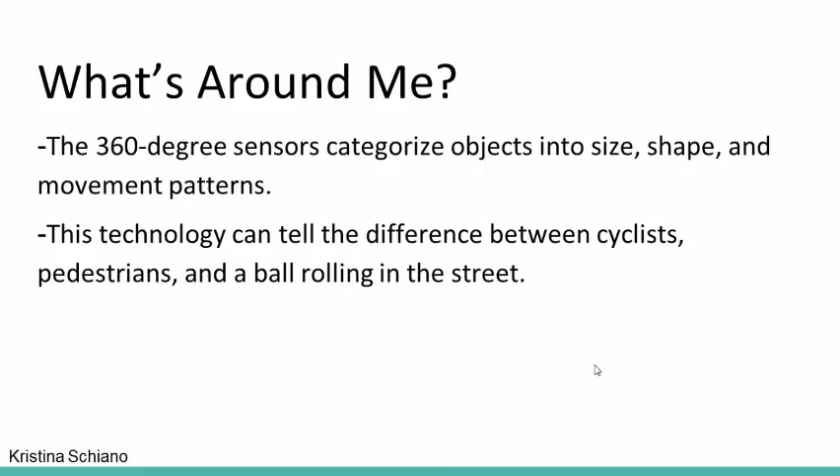The car really has to know the difference between different objects, which is very necessary. What will happen next?

The programming that went into predicting the future was meant to ensure passenger and pedestrian safety. It can sense when a pedestrian is about to cross the street or if a car is about to switch lanes.

It studies how fast objects are moving in relation to their size, and whether a driver is being reckless, or what the road conditions are like.

What should I do? The vehicle is programmed to react according to the obstacle or upcoming objects. This involves slowing down, speeding up, and moving toward the far part of the lane when a big truck is approaching.

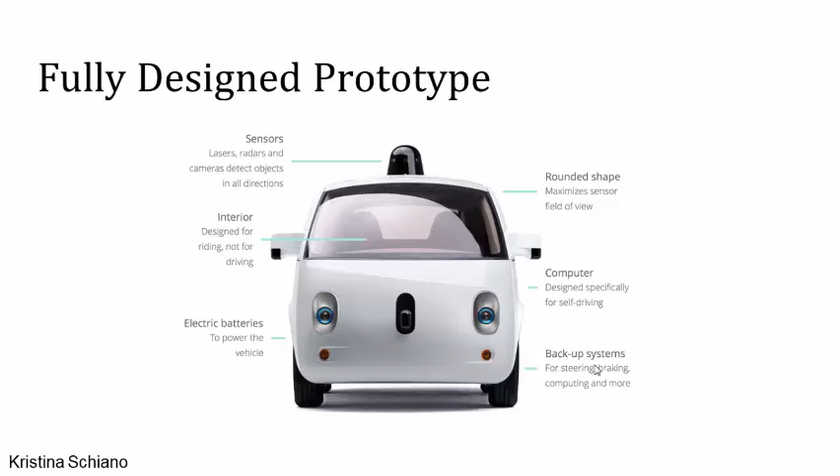There are electric batteries which power the vehicle, along with backup systems for steering, braking, computing, and more. There's also a computer installed to handle all the functionalities of the self-driving system.

As for the launch of the project, on-road testing has already begun, gathering over 1.5 million miles driven.

Google self-driving cars can be seen on the streets of Mountain View, California, Austin, Texas, Kirkland, Washington, and Metro Phoenix, Arizona. These cars are still going through field tests and are not yet available for purchase.

I actually watched the news and saw that a lot of these are being banned in certain states because they're not really ready for fully self-driven cars yet. So that's something we have to look at. So the second innovation is straddling buses.

The concept of the straddling bus was first developed by Huashi Future Parking Equipment Company in Shenzhen as a way to solve traffic problems in Beijing and other regions in China.

They faced an obstacle: to develop a transportation system that didn't add to current traffic congestion but reduced it, and one that didn't require building new transport infrastructure. This is where the concept of the straddling bus came into play.

If you know Beijing, they have some of the worst traffic, and their streets are usually always congested. So Huashi Future Parking Equipment Company came up with this concept to solve that problem.

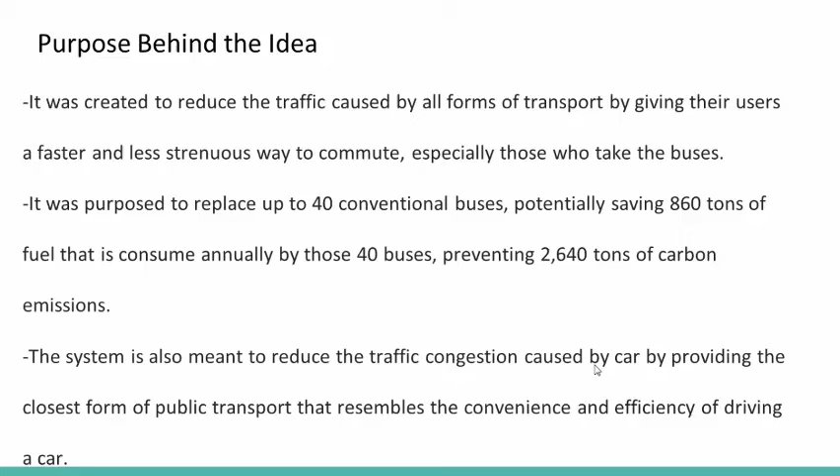Preventing 2,640 tons of carbon emission. The system is also meant to reduce the traffic congestion caused by cars by providing the closest form of public transport that resembles the convenience and efficiency of driving a car.

I'll explain more. The design concept of the straddling bus is very unique. The bus has two levels. The upper level carries passengers, while the lower level is the vehicle pass-through. It is wide, straddling 2 lanes at a time, letting traffic pass underneath when it is both stopped and when it is in motion.

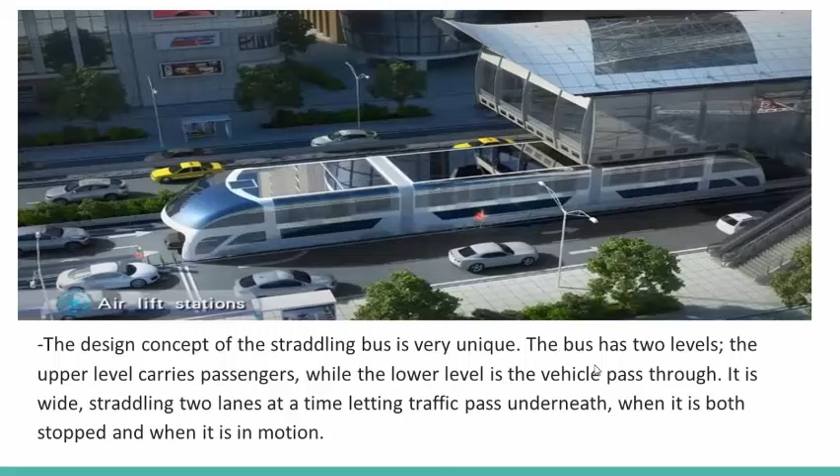Here's another picture of the bus actually going on the street. So you see it as it's moving, cars going inside the bus.

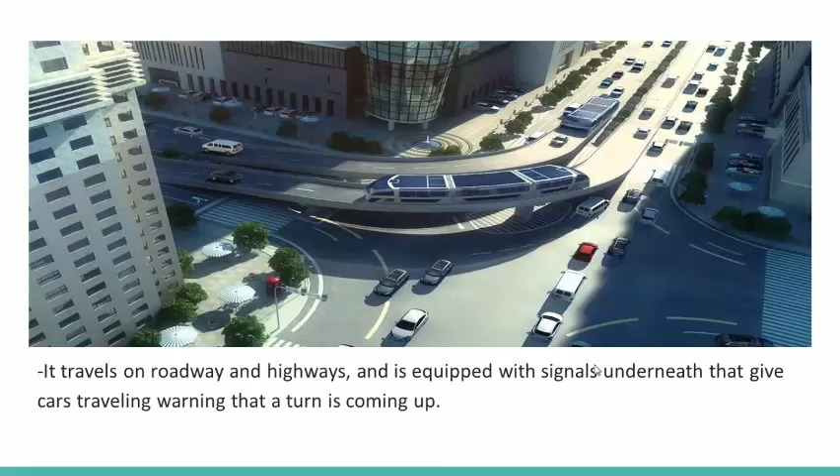It travels on the roadway and highways and is equipped with signals underneath that give cars traveling a warning that a turn is coming up. The bus has the ability to carry 1,200 to 1,400 passengers at a time.

Each car could hold up to 300 people. The buses are 6 meters wide and travel up to 60 km per hour. The underpass of the bus is 4 to 4.5 m, allowing only cars 2 m or less to pass underneath.

There are radars and sensors in the underpass that alert drivers passing underneath if they get too close to the bus, which also warns traffic approaching from behind if a vehicle is too tall to go under the bus. There will be sensors all over the bus to prevent things like collision and to warn drivers when the bus is about to turn.

Advantages of the straddling bus. The advantage of the straddling bus is its construction time. The construction of the bus can be completed within a year for a 40 km guideway.

It doesn't add to the pollution, but rather reduces it and uses renewable sources of energy. It doesn't add to the traffic jam, but reduces it by reducing the amount of vehicles on the road.

There's also no need to build parking structures for the bus, because cars can always go in through the bus when they are parked. So it doesn't really affect traffic, because traffic goes right into the bus. Construction of the bus also costs 10% less to make than what it costs to make traditional subways.

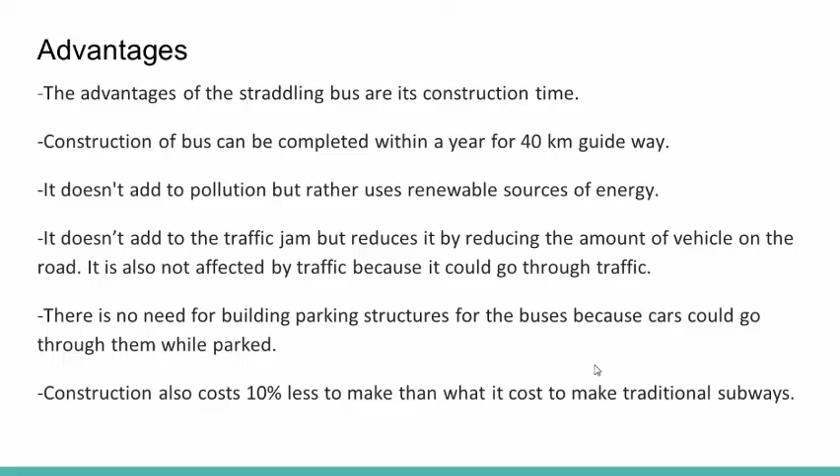Progress. In 2010, after the straddling bus was named one of Time Magazine's top 50 inventions of the year, the Beijing district of Mentougou proposed to begin trial runs for the new buses. The district planned out 186 km for the construction of the bus, but they put a hold on the actual project until the company establishes a prototype that is proven successful in trials.

So they actually put a hold on it just because originally they saw the idea and wanted to implement it without it going through trials. So they put a pause on that, and they're waiting for the company to actually do a trial model to show if it's actually possible for this to work and succeed.

So in 2013, the city of Manaus in Brazil signed a letter of intent with the Chinese developer to create a straddling bus system. Due to its short construction time, added benefits, and interest by other populated cities, we will be seeing this form of transportation in the next 30 years.

The Hyperloop. The Hyperloop was first proposed by Elon Musk in 2012. The concept of the Hyperloop consists of capsules running inside vacuum tubes with electric compressor fans in the nose of each capsule, which run on battery packs.

The battery pack will run during the entire trip with energy to spare, as the electric compressor's fan draws in air, which is expelled from the bottom of the capsules by motors to provide an air cushion that will suspend the capsules while it travels at 700 miles per hour.

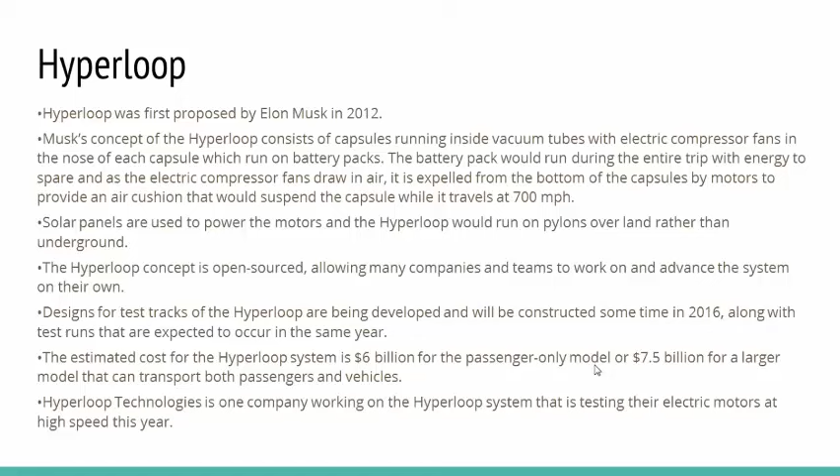The estimated cost for the Hyperloop system is $6 billion for the passenger-only model, or $7.5 billion for a larger model that can transport both passengers and vehicles. Hyperloop Technologies is one company working on the Hyperloop system that is testing their electric motors on the high speed this year.

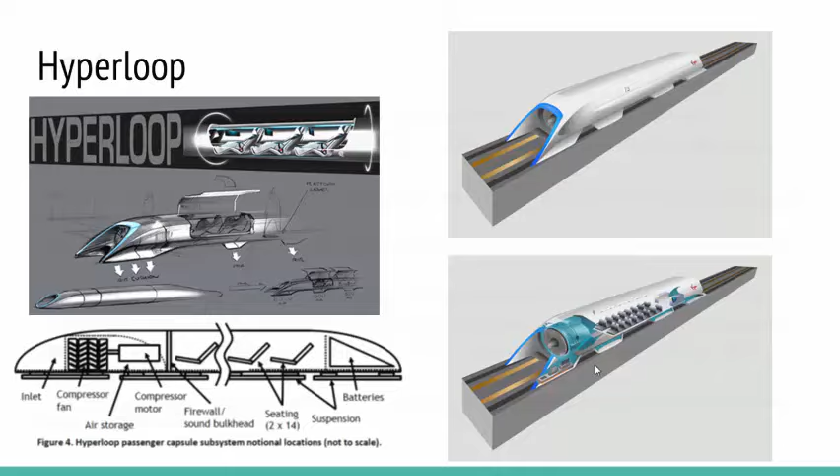The next system was developed by Tommaso Gecchelin, who has been working on the idea since 2012 and has improved upon it since, with his recent version being the 3.0 version.

Next are cube-shaped driverless pods that operate like taxis. They are called from the Next app and can fit up to 10 people. Next uses existing roadways and a cloud-based routing system that coordinates the autonomous pods, which can link together to create a chain of pods traveling to the same location.

One very innovative and convenient feature of Next is the service pods, which allow passengers to order service pods such as bathrooms, coffee shops, or restaurants, which come in their own pods and link up with your pod. So if you want coffee or want to use the bathroom, you can request it on your smartphone, and as you're traveling, another pod will connect with yours.

Next Future Transportation, Gecchelin's company, is currently working on a prototype and plans to launch the system by 2020. This is the image description of Next.

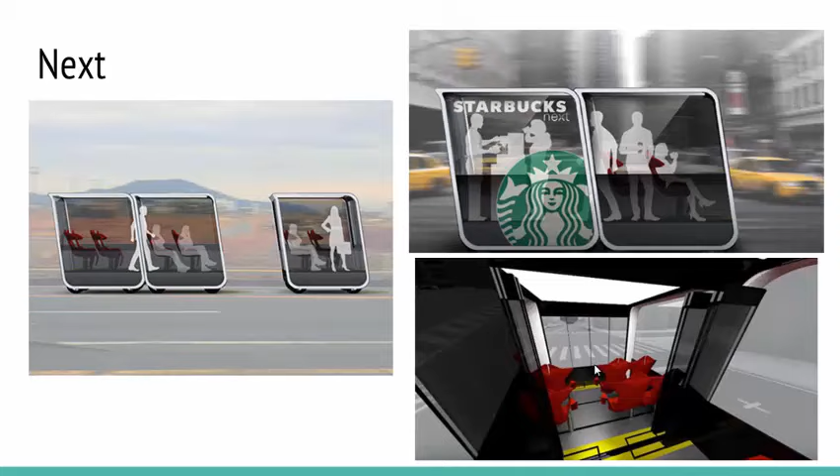Maglev trains: in 30 years, our lives will be changed because of the implementation of a sophisticated transportation system called the Maglev train, or magnetic levitation. It is a new mode of future transportation which was conceptualized during the early 1900s by an American professor and inventor, Robert Goddard, and a French-born American engineer, Emile Bachelet.

In the next 30 years, people will experience less pollution and less carbon dioxide, especially from Maglev trains. Carbon dioxide is much less than from autos, trucks, and airplanes, because of Maglev's very high energy efficiency, which would certainly be a benefit for passengers and for the environment.

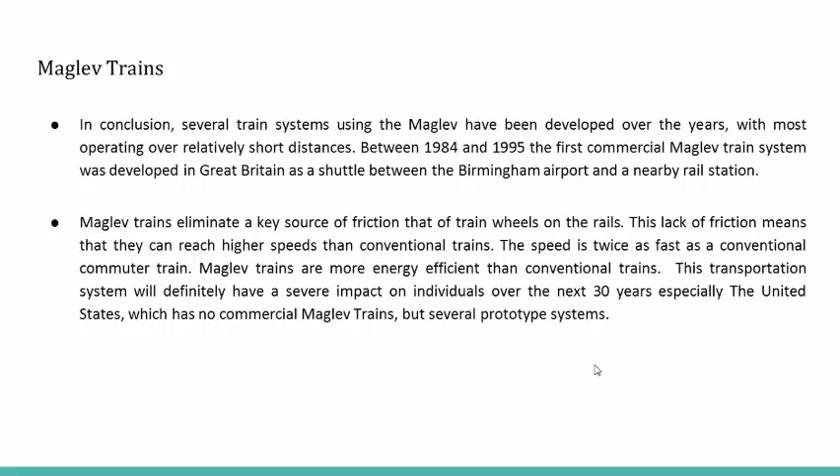The next innovation is the SkyTran. It is a network of computer-controlled, two-person, jet-like personal rapid transit system. The SkyTran was first proposed by inventor Douglas Malewicki in 1990, who spent the past 25 years inventing and developing the SkyTran concept. SkyTran is now based at NASA Ames Research Center in California, and its CEO is Jerry Sanders.

The advantages are its high capacity, as additional vehicles can be installed into the network as demand grows. The second advantage is that the transport is fast, with high speed moving up to 150 miles per hour. Passengers can get on and off with no stops between. It's flexible, operating 24 hours a day, 7 days a week, fully operational.

There are no schedules to follow or lines to wait in. All you do is call up a vehicle using your computer or smartphone. It also has lower cost, expecting to only charge $5 for rides, since the infrastructure is lower cost than underground or surface rail systems. Building a train this way costs less than building a surface or underground train.